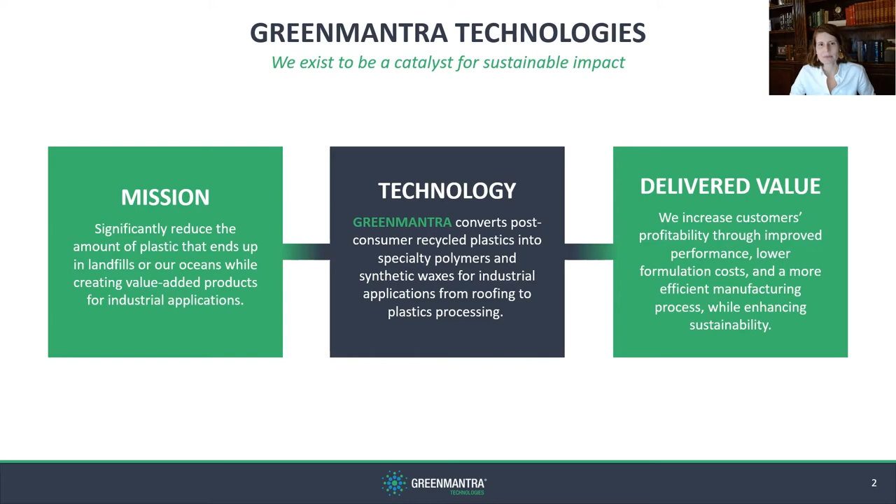By creating a more versatile specialty wax from waste plastics, we're creating a product that can now be used in a wider range of industrial applications. This allows GreenMantra to achieve our mission to significantly reduce the amount of plastic that ends up in our environment and oceans.

GreenMantra has rapidly scaled our technology over the past decade. The company was founded in 2011, and by 2016 we'd fully scaled our manufacturing operations and developed significant commercial business with our products. Last year, due to increasing market demand, we doubled our capacity at our manufacturing plant in Ontario, and this has allowed us to begin moving into new geographies and add additional new products to our portfolio. Each of the images on this slide was taken from our commercial manufacturing facility in Ontario.

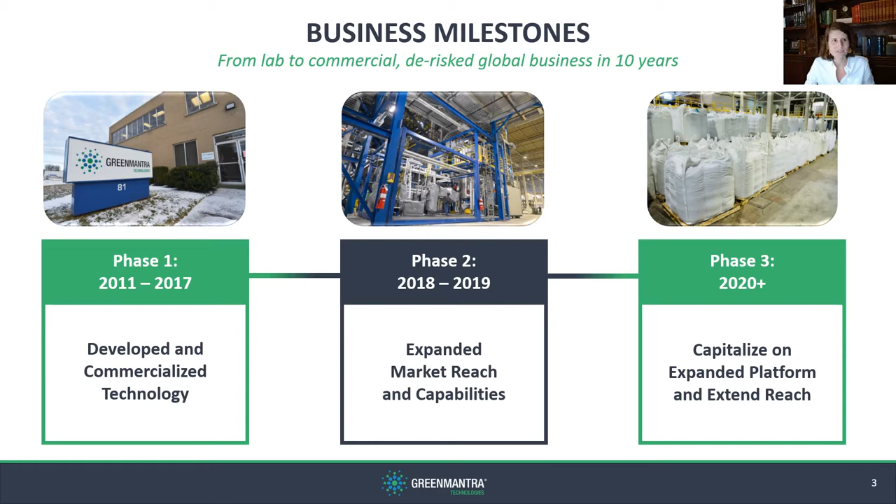Let's do a quick look at the landscape of advanced recycling and where GreenMantra fits in. Advanced recycling is critical to achieve a more circular economy, as it can accept challenging plastic streams that are unsuitable or uneconomical for mechanical recycling.

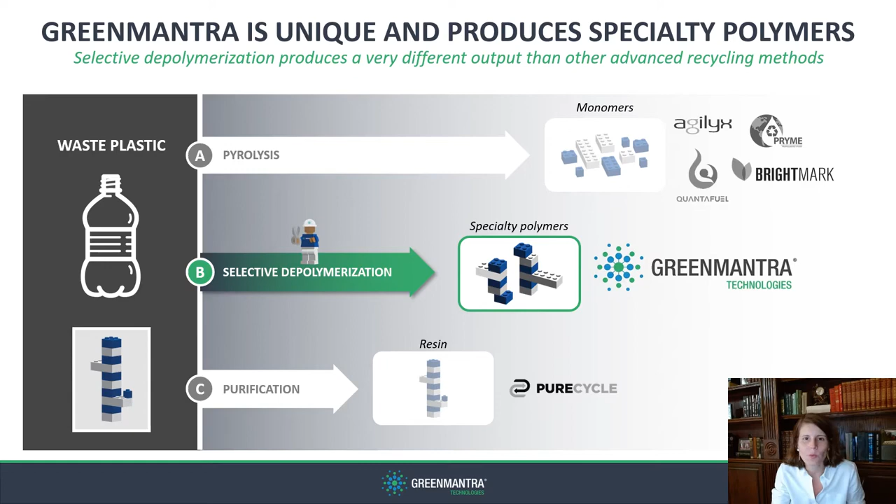To reduce or eliminate plastic waste, we need to create as many pathways as possible for recycling. GreenMantra often describes our approach to plastic waste as thinking outside the circle. Our business model is grounded in the fact that we upcycle undervalued plastic streams, such as polyethylene films, into value-creating polymer additives that can be used inside and outside the plastic industry.

By upcycling these undervalued plastic streams and creating valuable polymer additives, we open up more markets to generate demand for waste plastics. These new markets include things like asphalt roofing and roads, where recycled plastics were not previously used, which also have a significantly longer service life than that original plastic bag. This allows us to recapture the value of these waste plastic streams, using them as a resource.

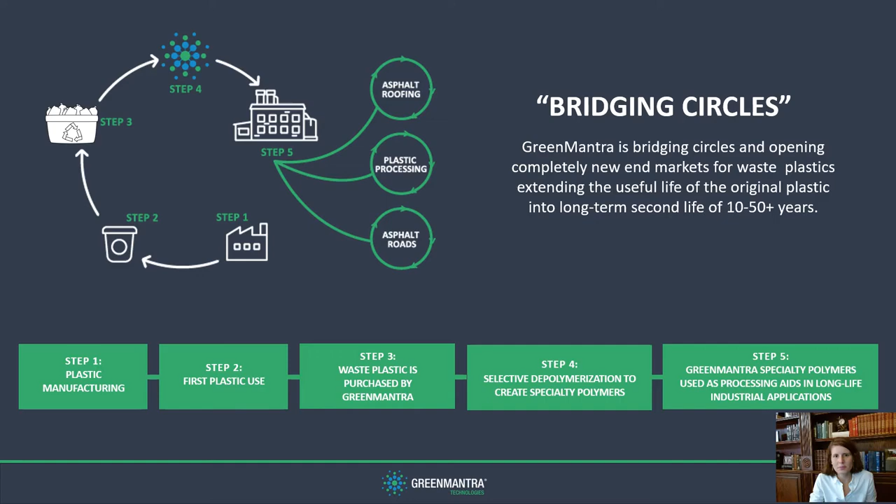Our positive environmental impact is enabled by each step of our business model, from raw material all the way through to our targeted applications. Our feedstocks are waste plastics, and we target streams that others can't use. Our process is unique in that it's extremely efficient - the catalyst does all the work, allowing low energy demands, and no waste streams are generated. The only water used is recirculated to cool our products, meaning no wastewater treatment is required. Our process eliminates the inherent variability of recycled plastic streams, allowing us to create high-value specialty polymers with narrowly specified physical properties. Our targeted end markets are long lifespan products that sequester the original carbon for 50 or more years.

In all our markets, we know that customers desire sustainability, but often decisions are driven by performance. In the specific market we're talking about today, asphalt, engineers often like to characterize performance according to what they call the 3 E's: engineering, environment, and economics. GreenMantra delivers benefits in all 3 of those categories, and I'll tell you more about that in the upcoming slides.

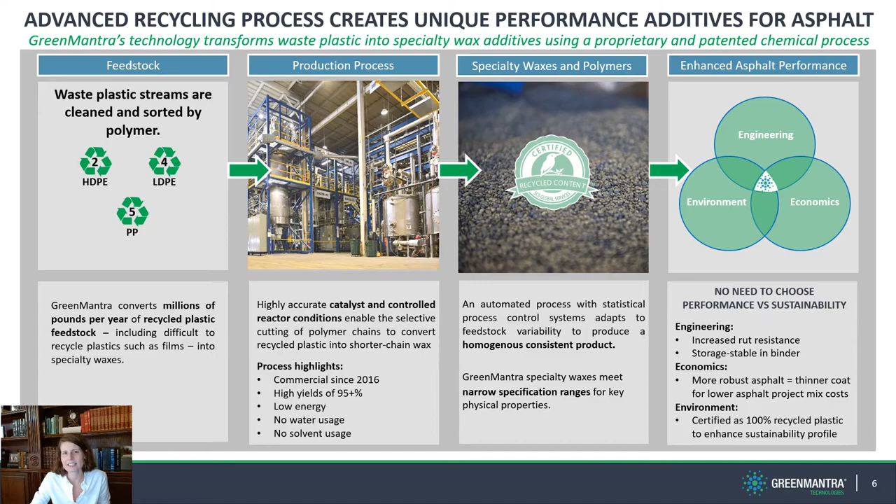Mechanical recycling is the right option for recycling many plastic products, especially rigid and larger plastic forms, and it's critical that we continue to develop our mechanical recycling infrastructure as the primary route for recycling those plastics.

However, as Kim mentioned in her presentation, there are many plastic forms that aren't very suitable for mechanical recycling, with one of the most notable examples being films.

Some of these plastic forms are already collected in this existing infrastructure. For example, when a consumer places a film in a blue bin and it arrives at a MRF, it's separated out prior to the recycling process, baled together with other contaminated films. But it's not economical to clean and refresh those films, so without an outlet, they're often sent to landfill.

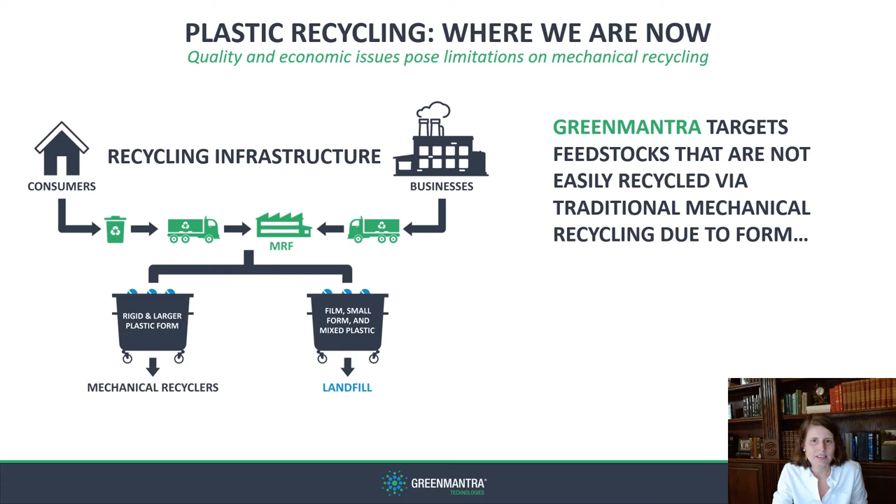Similarly, when a manufacturer or a retailer generates wet or contaminated films, the existing recycling infrastructure has few end markets that can incentivize the processing and recycling of those films.

GreenMantra's objective is not to create new collection infrastructure. Instead, we're working with cities, states, and private partners to integrate directly with this existing infrastructure to capture films and other more challenging waste plastic streams and bring them to our facility.

Our technology is complementary to mechanical recycling, taking those streams that the existing infrastructure cannot accept and offering an outlet to decrease the amount that goes to landfill.

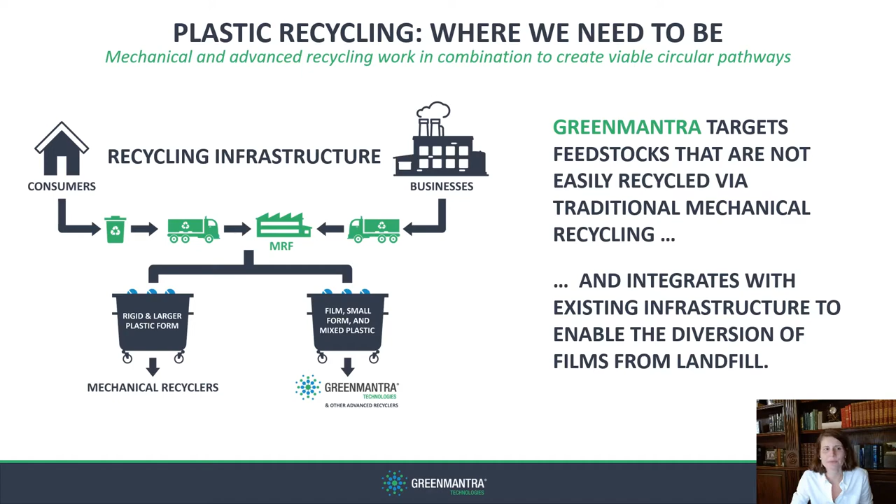We transform those streams into a specialty polyethylene wax to enhance bitumen. In case you're not familiar with the word bitumen, that's the highly viscous black liquid that's combined with aggregate to create the asphalt used to pave parking lots and roads. When GreenMantra's wax is added to bitumen, it helps create a better performing and more durable road.

Another interesting benefit is that GreenMantra's materials enable a more robust asphalt formulation, which allows asphalt producers to incorporate other waste materials, things like reclaimed asphalt or ground tire rubber from used tires. So our products allow for better performance and also help the asphalt manufacturer to achieve a very high sustainability profile.

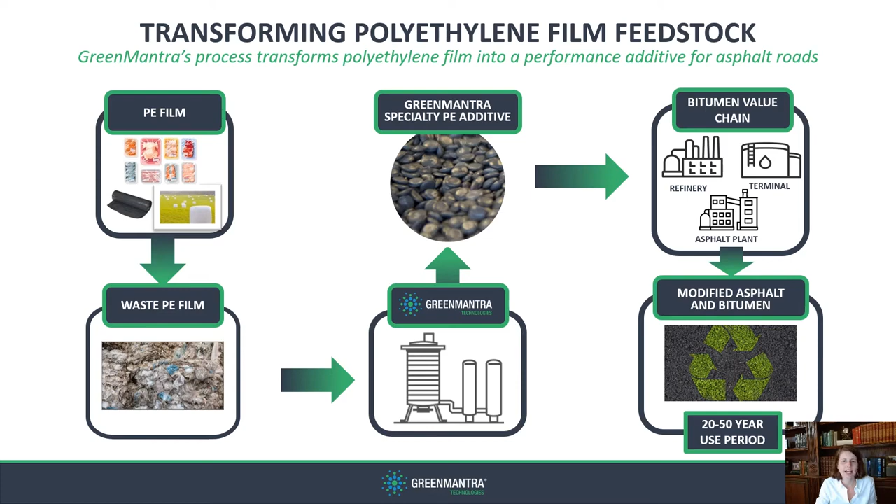As Kim mentioned in her presentation, there's been a lot of focus over the past decade to develop new end markets for recycled films, and asphalt is one of the most promising emerging end markets. This new type of asphalt has been deemed recycled plastic modified asphalt, or simply RPM asphalt for short.

Asphalt often requires a modifier to increase its durability and performance at higher temperatures. Historically, those modifiers have been based on virgin polymers. RPM asphalt uses modifiers based on recycled plastic products instead of virgin polymers to enhance performance.

The U.S. spends around $177 billion each year on highway funding, making it the largest category in public infrastructure spending, with asphalt roads comprising a large portion of that. Preliminary data suggest RPM can increase asphalt life and performance while creating an important end market for recycled plastic.

Based on this preliminary data, some countries, especially in Southeast Asia, have rushed to incorporate high levels of recycled plastic in asphalt. This rush to find a new home for waste plastic without the proper science and technical validation work up front has caused premature failures in pavement performance in some of those roads.

The highway program here in the U.S. takes a much more measured approach to using new materials in our roads, and studies on the engineering, economic, and environmental benefits are mandatory before any new asphalt technology is implemented into practice.

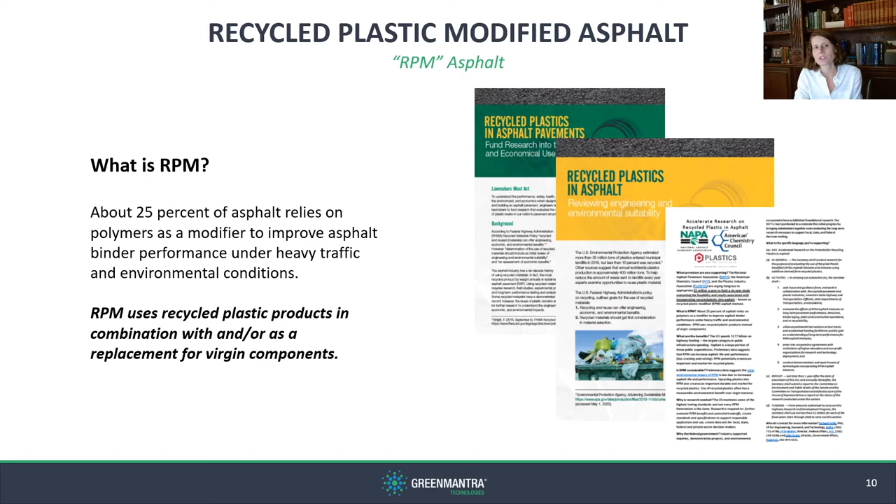Developing and validating a new end market for waste plastics in asphalt will require significant amounts of research, and we've seen lots of movement at the federal and state levels to support this research. These next two slides give a few examples of federal and state level legislation and initiatives designed to explore how recycled plastics can be responsibly incorporated into our nation's roads.

This topic really came into focus earlier this year when Representative Tim Burchett pressed Secretary of Transportation Pete Buttigieg on why the UK was using waste plastics in asphalt, but the US is still lagging behind. This created a national spotlight on the topic, which prompted NAPA, the ACC, and the Plastics Industry Association to form a coalition to advocate for a technical and responsible approach to exploring the potential use of RPM asphalt.

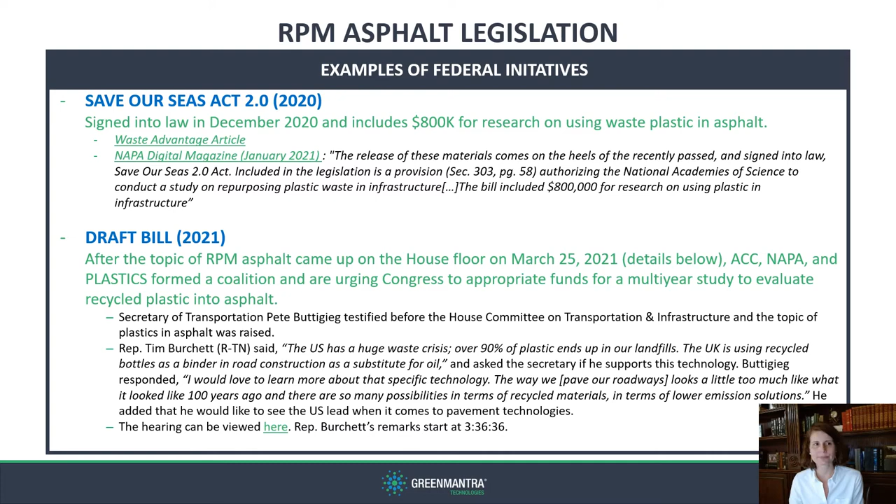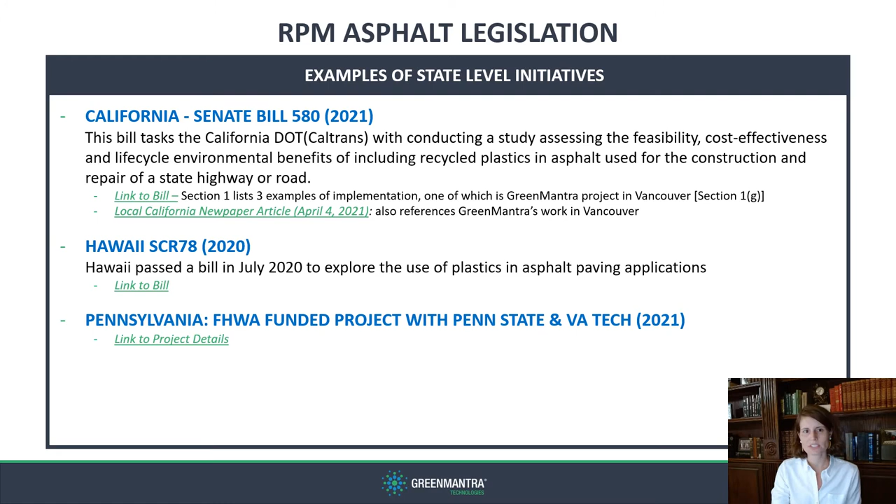The next few slides give an overview of the different options and benefits for creating recycled plastic modified asphalt, or RPM. First, it's important to note that standard asphalt itself, in an oversimplified state, is simply the mixture of liquid bitumen and aggregate in the presence of heat.

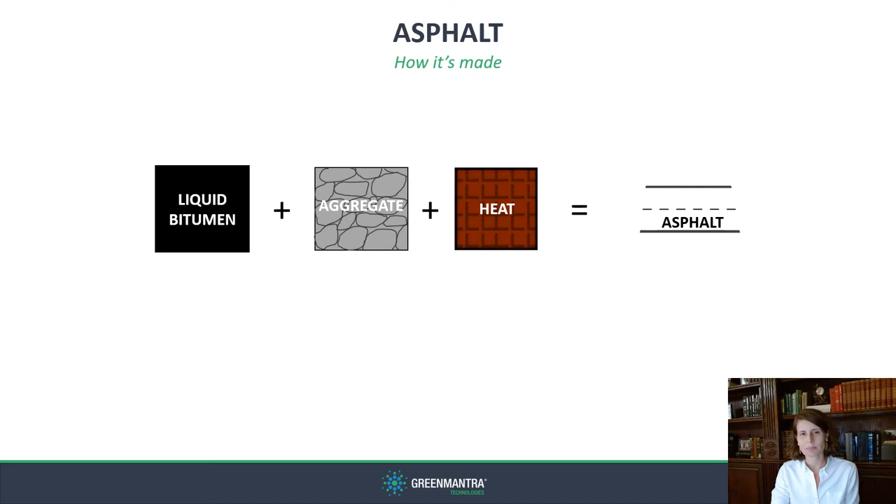RPM asphalt simply adds an additional component, recycled plastic, to the mixture. Depending on the method of addition of the recycled plastic, it can either become part of the bitumen to help bind the aggregate - this is called the wet process - or it can remain solid, replacing some of the aggregate - this is called the dry process.

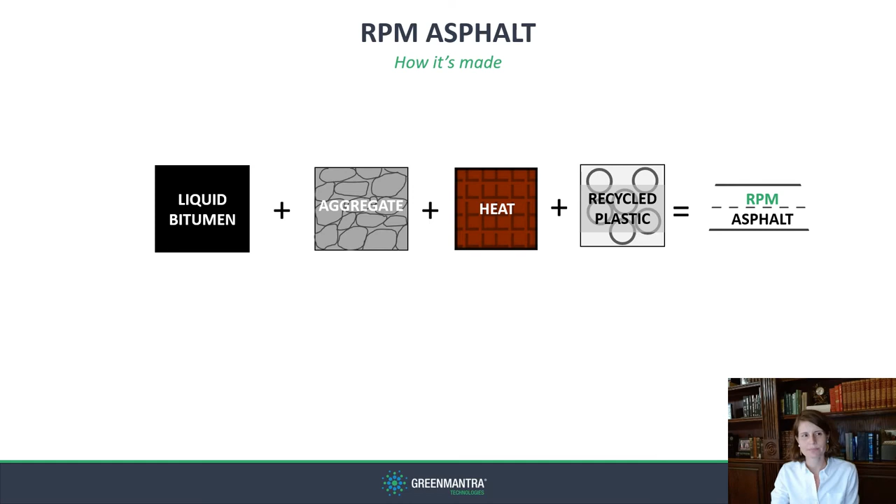Each of these techniques has its advantages and disadvantages and yields different results. The dry process is a technique used widely in India and Southeast Asia, where recycled plastic particles are added at the end of the process together with other aggregates. The advantages of this approach are mainly due to its ease of use - it can be done at virtually any asphalt plant.

The disadvantages, however, can be quite significant due to the inconsistent quality that can lead to premature cracking. Additionally, because the plastic particles are not melted or incorporated into the bitumen, they remain suspended in the asphalt, creating an increased risk for microplastic generation at the surface of the asphalt.

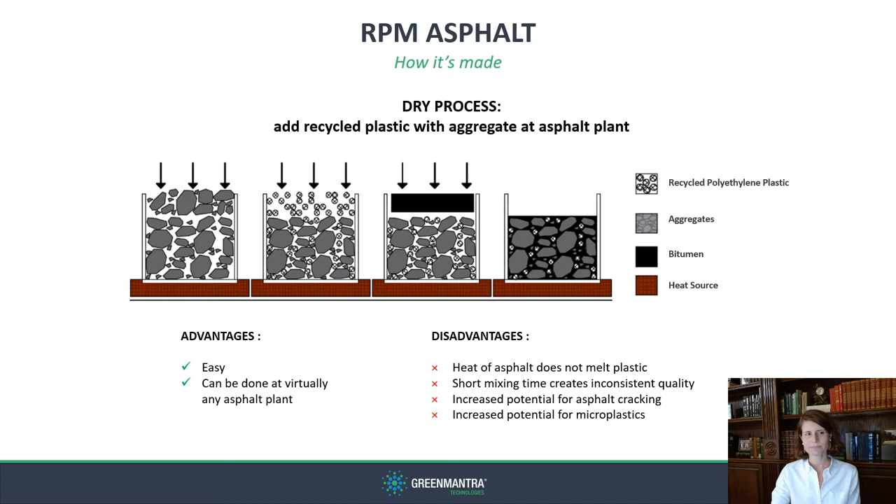The wet process is the technique that Kim introduced earlier as she described the work that was performed by the Plastics Industry Association. In the wet process, recycled plastic particles are added at the beginning of the process to the liquid bitumen. The plastic is fully melted into the bitumen prior to any addition of aggregate.

This is a technique that is becoming more preferred for performance-based asphalt, as some preliminary studies have indicated potential performance benefits. The advantages of this process include improved asphalt performance, including better rut resistance. The disadvantages mainly lie in the fact that recycled plastics are not stable in the bitumen mixture, so they require high shear mixing and constant agitation to remain in suspension in the bitumen.

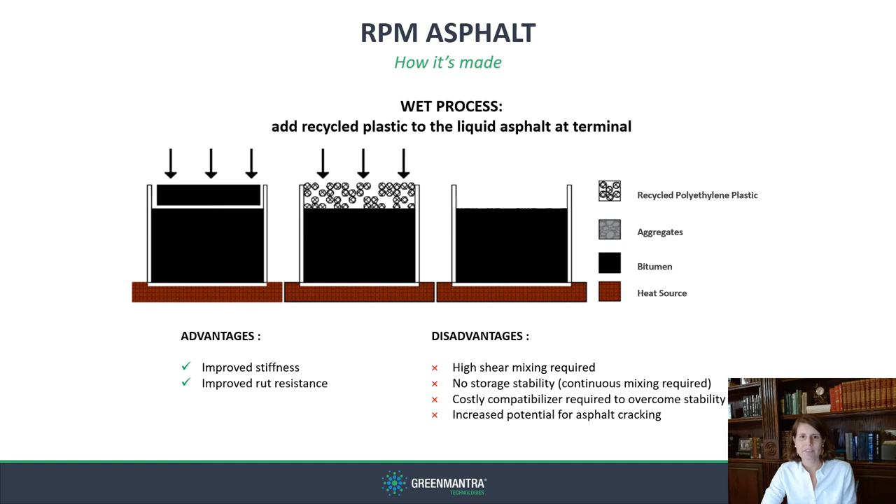Some companies have developed compatibilizers that enhance the stability of the recycled plastic modified bitumen, but this adds significant cost to the final asphalt formulation. So although unmodified recycled plastic can be added to the bitumen via the wet process, the resultant modified bitumen is susceptible to phase separation and cracking issues.

One effective approach to overcome these stability challenges is to chemically modify recycled plastics to improve their compatibility with the liquid asphalt binder. GreenMantra has developed a revolutionary new RPM technology by chemically modifying recycled plastics to create specialty waxes that are designed for asphalt.

These waxes increase the thermal stability of asphalt, enhancing its stiffness and rut resistance. They also allow for lower paving temperatures, which can help reduce the amount of fumes and the overall carbon footprint of a paving operation.

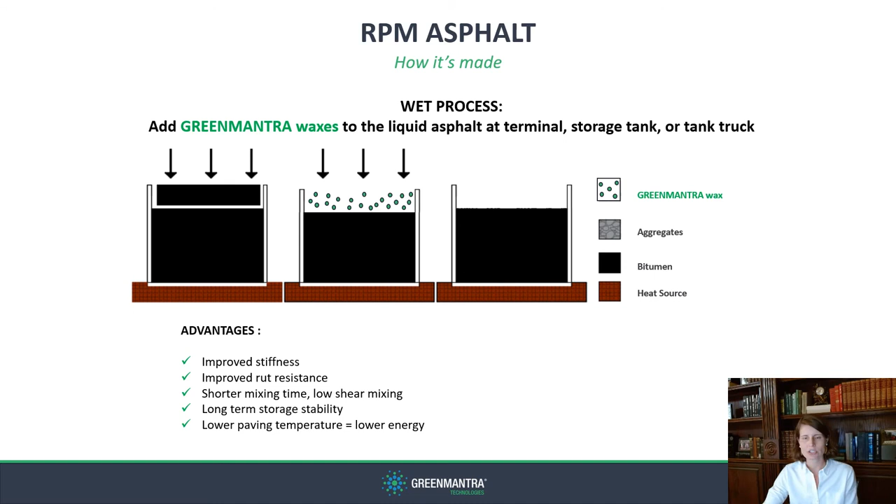The difference between GreenMantra's recycled plastic waxes and unmodified recycled plastic can be visualized using fluorescence microscopy, or FM. FM is a scientific method that uses a UV light to analyze the miscibility of components and is often used to check the distribution of polymers in bitumen.

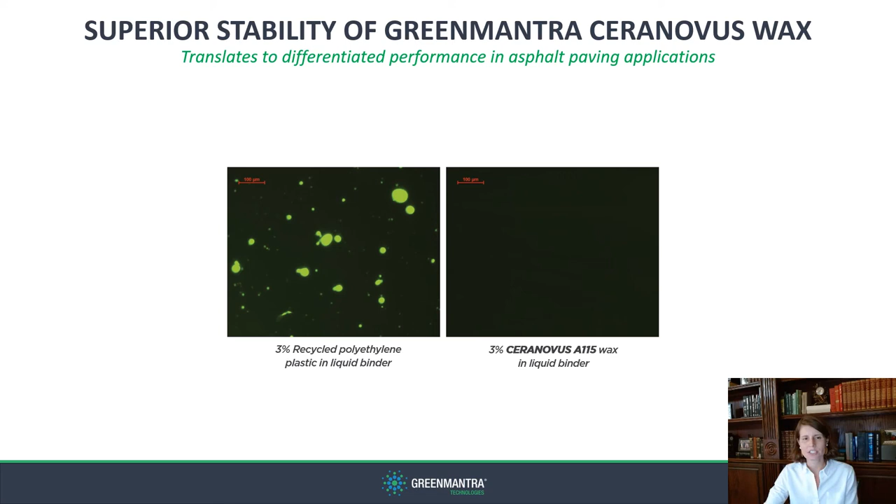Green Mantra waxes offer a revolutionary way to add waste plastics to asphalt while simultaneously enhancing performance. Compared to standard recycled plastics, Green Mantra waxes are easily mixed at lower temperatures with standard low-shear mixing. They remain stable and fully incorporated in the liquid asphalt binder for a minimum of 14 days with no additional mixing required. The ease of use and long-term stability of Green Mantra waxes translates to differentiated performance in asphalt compared to standard recycled plastics.

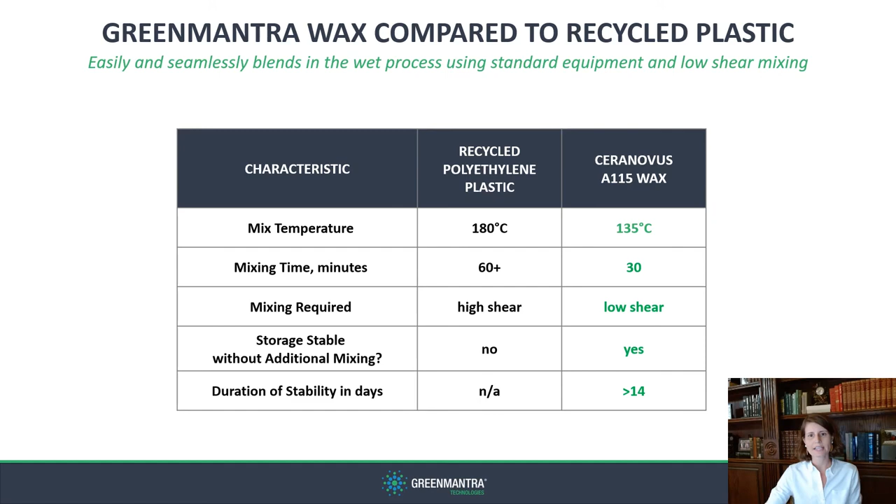Asphalt pavements must meet demanding engineering specifications. The drive for sustainability must always be responsibly balanced with asphalt performance standards and cost concerns. Green Mantra waxes achieve this balance as they are specifically designed for compatibility with the liquid asphalt binder, providing improved rutting and crack resistance. This results in a more robust mixture with reduced fatigue damage, which translates into project cost savings through reduced pavement thickness and higher resource efficiency.

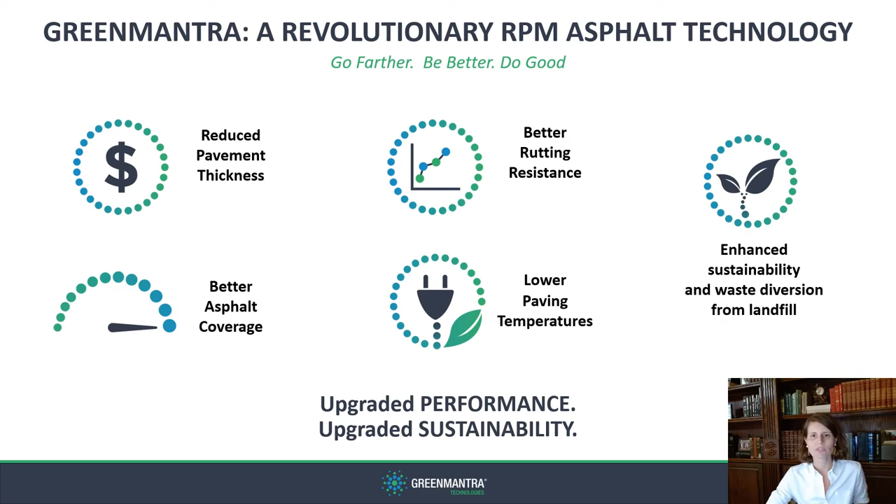The ability to pave at lower temperatures complements both the environmental benefits and further contributes to cost savings. Green Mantra waxes are derived from 100% recycled plastics, so they effectively combine environmental benefits of sustainable content with performance and economic benefits. The following slides give a few examples of field usage and current projects with Green Mantra waxes.

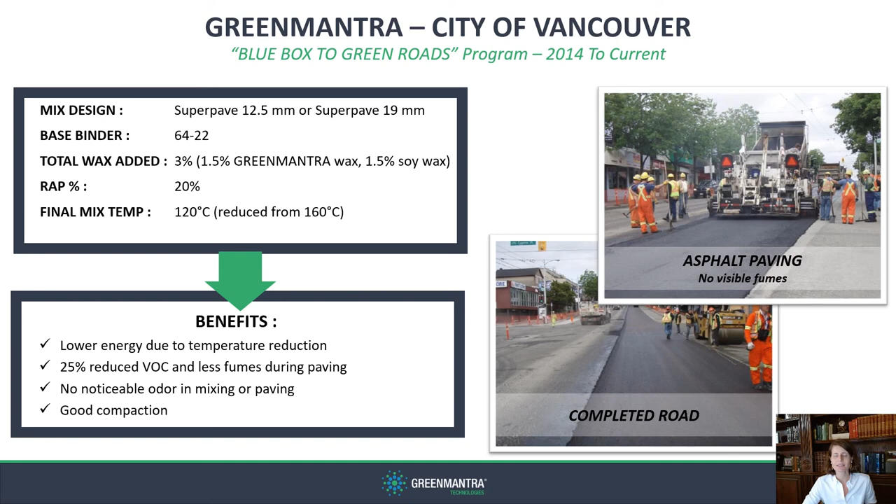This first slide presents a paving program between GreenMantra and the City of Vancouver that's been ongoing since 2014. In this program, deemed Blue Box to Green Roads, the city uses Green Mantra waxes to enable lower paving temperatures, generating lower energy demands and a significant reduction of VOCs and fumes during paving.

In the Middle East, one of our private partners uses Green Mantra waxes as part of a proprietary blend with ground tire rubber. Green Mantra's waxes increase the workability of the mixture, allowing them to achieve a significantly higher loading level of ground tire rubber to create a higher performing asphalt that can be used in demanding heavy traffic areas such as industrial parks and construction sites.

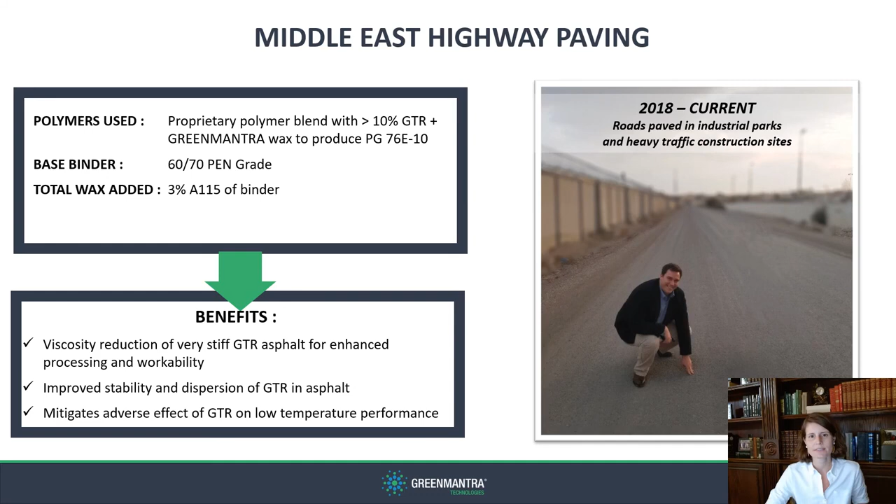Another significant project specific to Pennsylvania occurred in March 2020 and should be officially announced in the coming weeks. This was a major project with a notable Pennsylvania-based private partner that validated the performance of our wax in a standard warm mix asphalt binder that's typical for the state. A test strip was placed in a heavy construction area, and the performance was carefully monitored for over a year against a controlled paving strip.

The RPM asphalt with Green Mantra's wax has shown outstanding performance compared to the control, and the partners decided to move forward with a larger paving project in Q3 of this year.

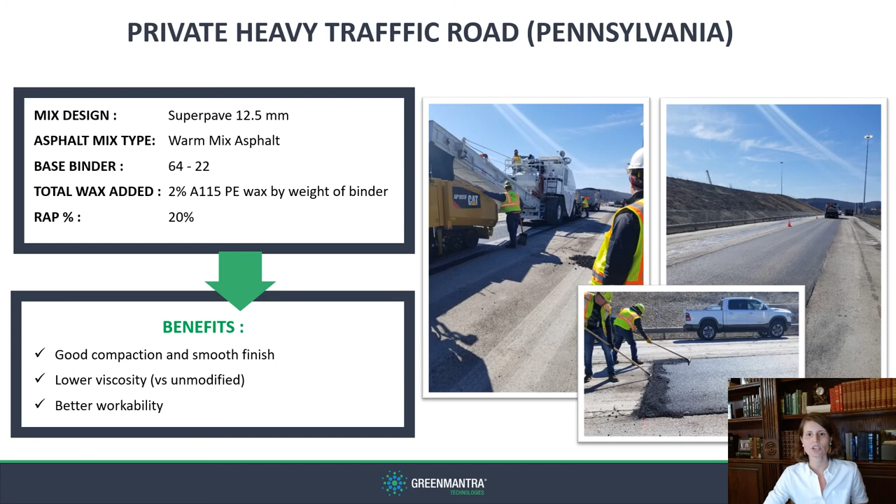Finally, here's a summary of some of the most exciting projects we have ongoing at the moment. Our private project in Pennsylvania is one of the most exciting ones on the list, and we have active conversations ongoing with PennDOT to evaluate our material for wider use in roads in the state.

We are really pleased to see the high level of engagement in Pennsylvania and look forward to expanding our presence in the state as we find more private and public partners willing to work with us on demonstration projects and private roads to further validate the performance of our recycled plastic waxes in asphalt.

In summary, I want to highlight the significant environmental impact that exists within this new end market for waste plastics and films. Because GreenMantra's waxes are derived from 100% recycled plastics, they significantly enhance asphalt sustainability, creating environmental benefits by displacing a portion of the petroleum-based liquid binder and by diverting approximately 3 million waste plastic bags from landfill for every mile of road paved.

It's an impact that we are looking forward to multiplying as we move forward with more projects in the state of Pennsylvania and across the rest of the United States. By collectively working together to validate these new markets, which in turn incentivize and drive collection of landfill-bound waste plastic streams, we can pave the way to a more sustainable future.